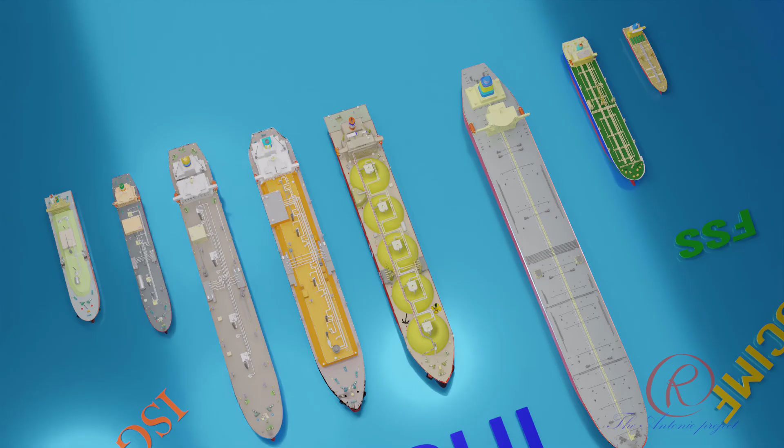Inert gas in maritime industry. Inert gases are widely used in the maritime industry, primarily for safety and operational purposes, especially in hazardous cargo tank management and fuel systems. As previously discussed, the term inert gas is context dependent. In the maritime industry, as per the International Safety Guide for Oil Tankers and Terminals or ISGOTT, inert gas is defined as a gas or a mixture of gases, such as flue gas, containing insufficient oxygen to support the combustion of hydrocarbons.

Oil Companies International Marine Forum or OCIMF recommends that all oil tankers, regardless of size, be equipped with inert gas generators to enhance safety. New statutory requirements for fixed inert gas systems entered into force on 1 January 2016 as a result of changes to SOLAS, the Fire Safety Systems or FSS code, and the International Bulk Chemical or IBC code.

International Maritime Organization or IMO regulations have progressively mandated the installation of inert gas systems on tankers of various sizes, with the latest rules covering all tankers of 8,000 deadweight tonnes.

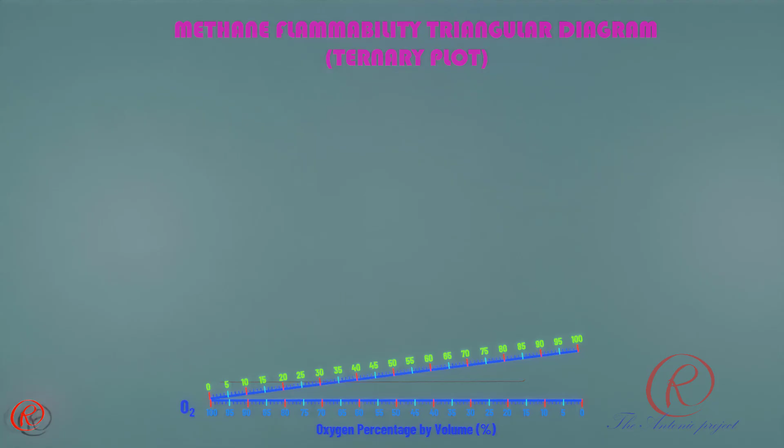Flammability triangular diagram or ternary plot. We will learn to draw a flammability triangular diagram, also known as a ternary plot. It is used to represent all the possible mixtures of a three-component system. The diagram shows the control of flammability in mixtures of fuel, oxygen, and inert gas, typically nitrogen. The diagram implicitly uses the feature that the sum of all three components is 100%. This diagram is for methane or CH4 as fuel, located on the left leg, nitrogen on the right leg, and oxygen on the bottom.

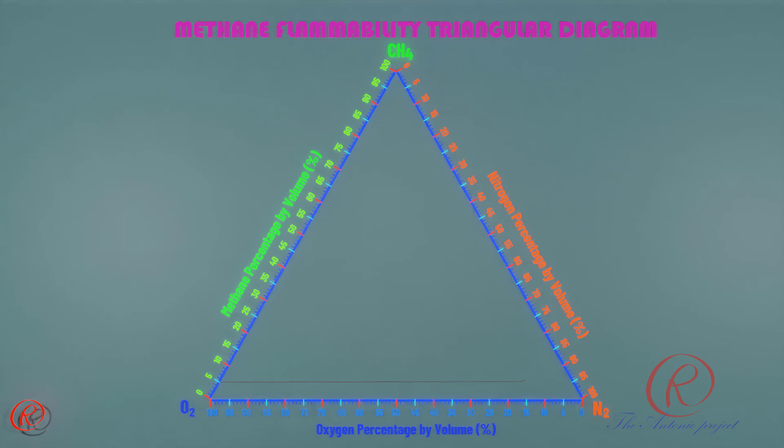Air line: the percentage of oxygen in the air is 20.95%. Lower flammability limit, or LFL: the lowest concentration at which a mixture of flammable vapor or gas and air is flammable. The lower flammability limit of methane is 5%. Upper flammability limit, or UFL: the highest concentration at which a mixture of flammable vapor or gas and air is flammable. The upper flammability limit of methane is 15%.

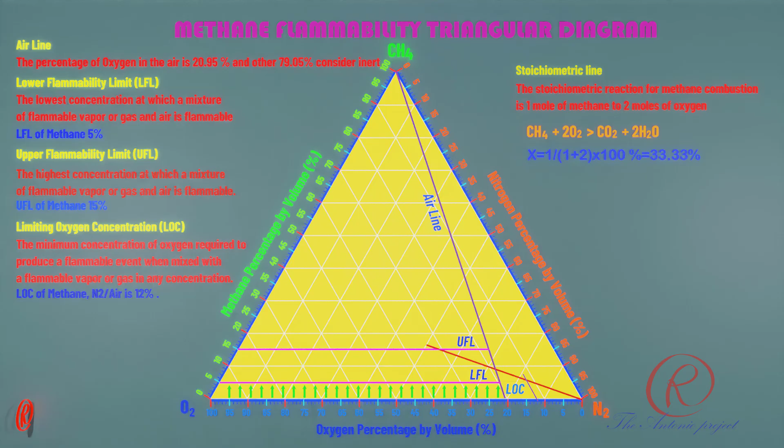Limiting oxygen concentration, or LOC: the minimum concentration of oxygen required to produce a flammable event when mixed with a flammable vapor or gas in any concentration. The limiting oxygen concentration of methane in air is 12%. The stoichiometric line: the line that shows the concentration of a substance in a mixture that is in the correct ratio to react with another substance.

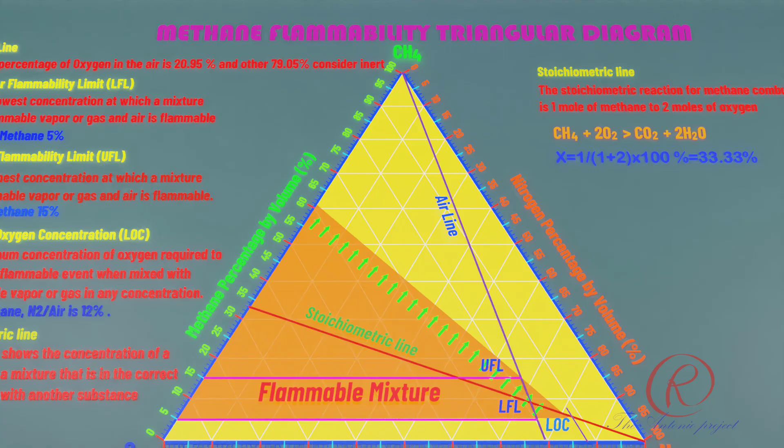The stoichiometric concentration of methane in oxygen is 1 mole of methane to 2 moles of oxygen: CH4 + 2O2 → CO2 + 2H2O. The result of calculating the stoichiometric concentration of methane in oxygen is 33.33%. The lower limit at which methane in oxygen can burn is 5.1% and the upper limit is 61%. The brown shaded area shown in this animation is the flammable mixture area. This is illustrated in the animated diagram, where only mixtures within a loop-shaped area are capable of burning.

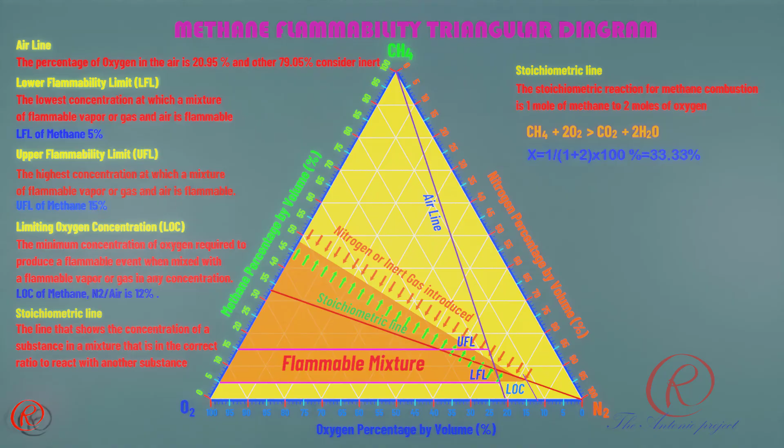In order to prevent or extinguish fires, inert gas is used by increasing the inert gas concentration. Inert gases suppress fires primarily by reducing the oxygen concentration in the environment to a level where combustion cannot be sustained. When the inert gas, in this case nitrogen, concentration is increased, the concentration of methane and oxygen will reduce. Then the flammable mixture decreases from the upper flammability limit until it reaches the lower flammability limit. And when inert gas is continuously added, no fire can form in a gas mixture below the lower flammability limit, even when oxygen is added.

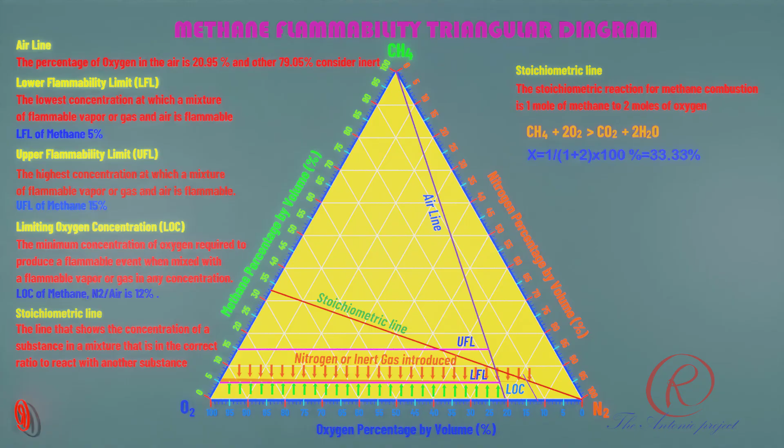Adding an inert gas to a hydrocarbon gas-air mixture increases the lower flammability limit concentration and decreases the upper flammability limit concentration. And that is the principle of how inert gas works to prevent or extinguish the fire.

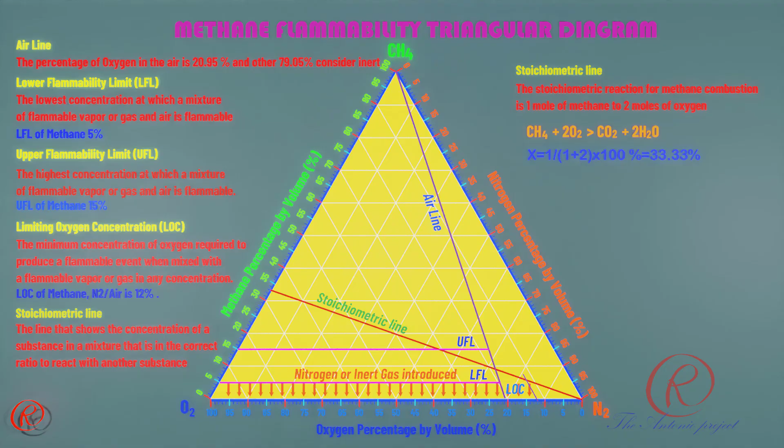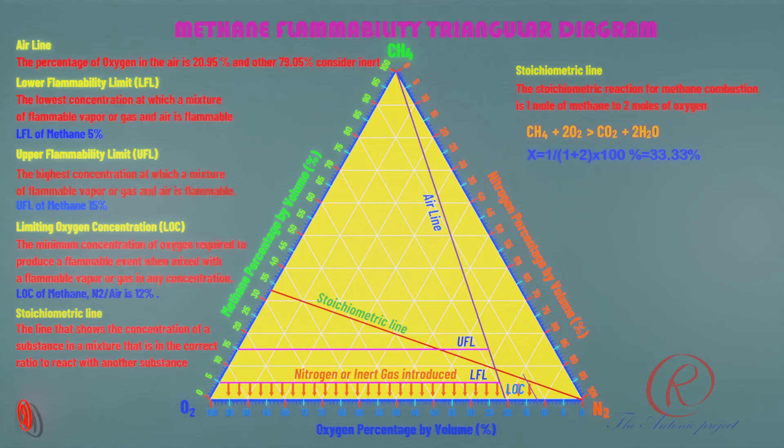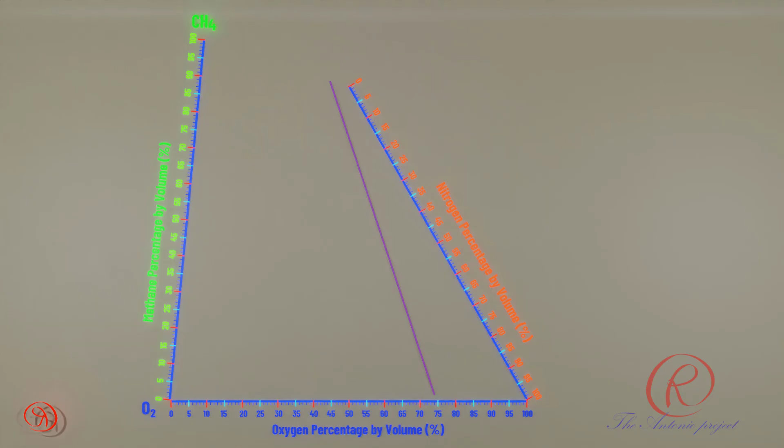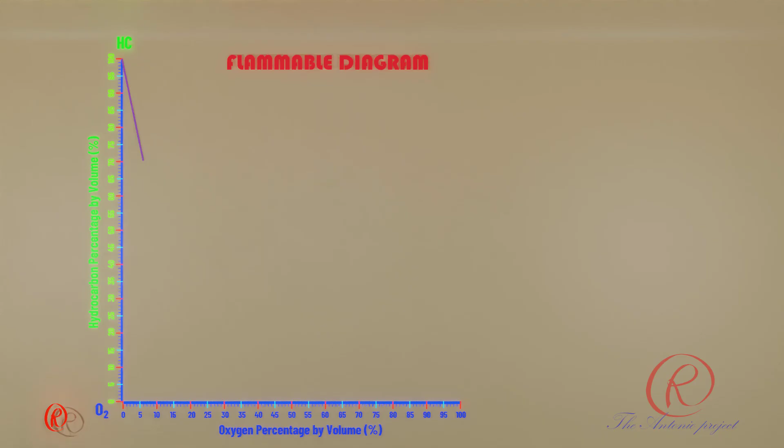Flammability composition diagram, or flammability diagram. Next, we will learn about the flammability composition diagram, also known as the flammability diagram or combustion diagram. It's a graphical representation used to illustrate the conditions under which a mixture of fuel, oxygen, and an inert gas like nitrogen can ignite or sustain combustion. The percentage of oxygen in the air is about 20.95%. Other gases except methane and hydrogen are considered inert gas. In total, the concentration of inert gas is about 79.05%.

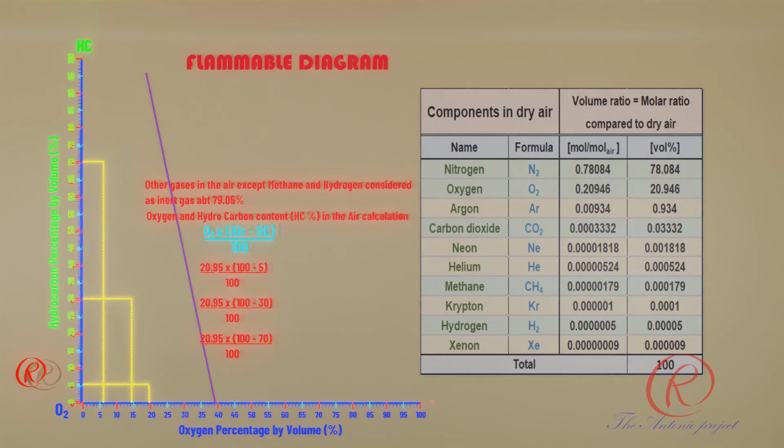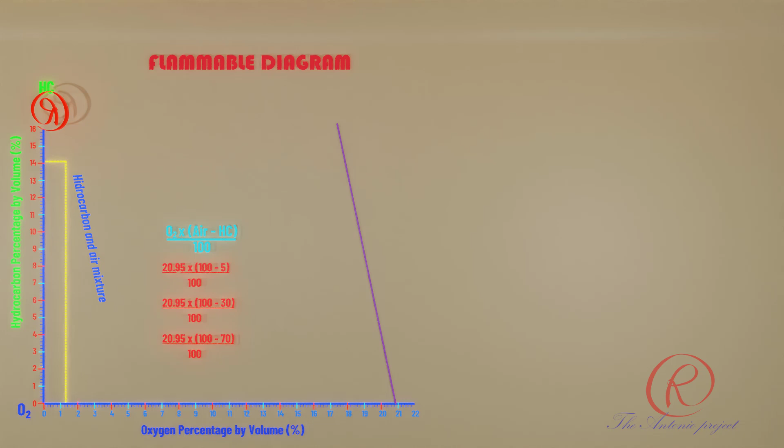The oxygen and hydrocarbon mixture in air calculation is as follows. The formula is oxygen in air times (100 minus hydrocarbon) divided by 100. For example, when the hydrocarbon concentration is 5%, the oxygen concentration of the air and hydrocarbon mixture is 19.90%. When hydrocarbon is 30%, the mixture is 14.67%. When hydrocarbon is 70%, the mixture is 6.29%, and so on. When the hydrocarbon and air mixture values are connected, it creates a slope line of mixture between hydrocarbon and air. In the flammability diagram, the slope or slant line of the hydrocarbon and air mixture is indicated with points A and B.

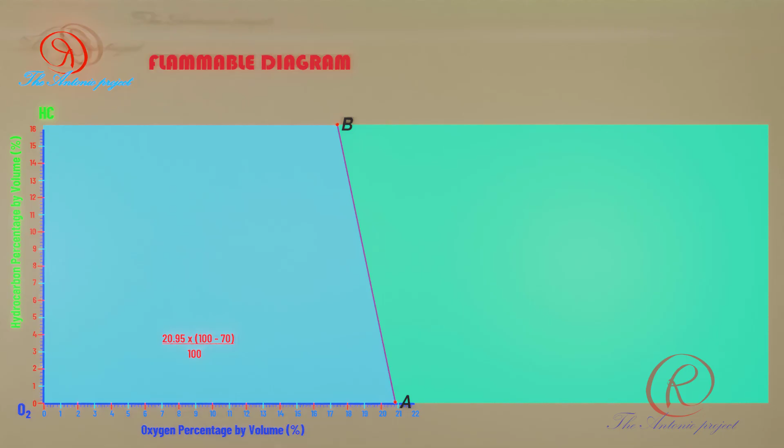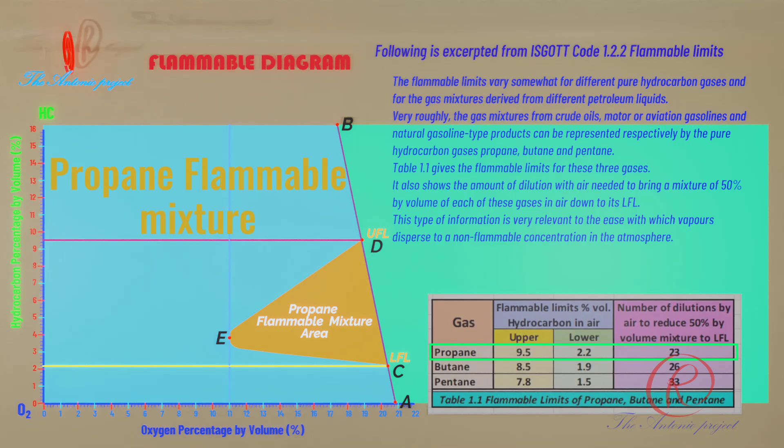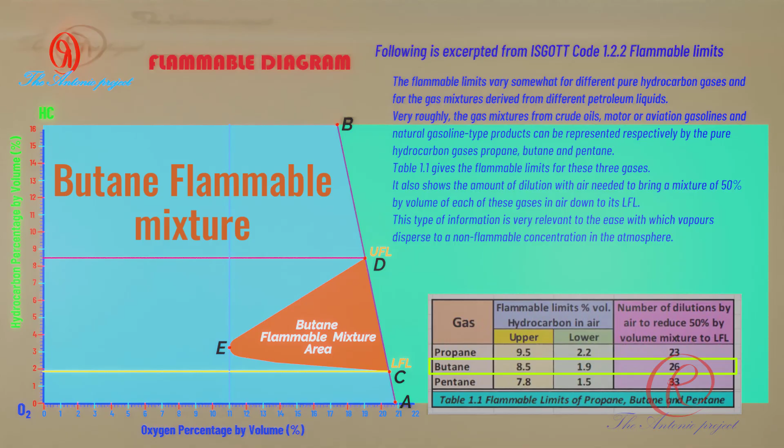Following is excerpted from ISGOTT 1.2.2, Flammable Limits. The flammable limits vary somewhat for different pure hydrocarbon gases and for the gas mixtures derived from different petroleum liquids. Very roughly, the gas mixtures from crude oils, motor or aviation gasoline, and natural gasoline type products can be represented respectively by the pure hydrocarbon gases propane, butane, and pentane. Table 1.1 gives the flammable limits for these three gases. It also shows the amount of dilution with air needed to bring a mixture of 50% by volume of each of these gases in air down to its lower flammable limit, or LFL.

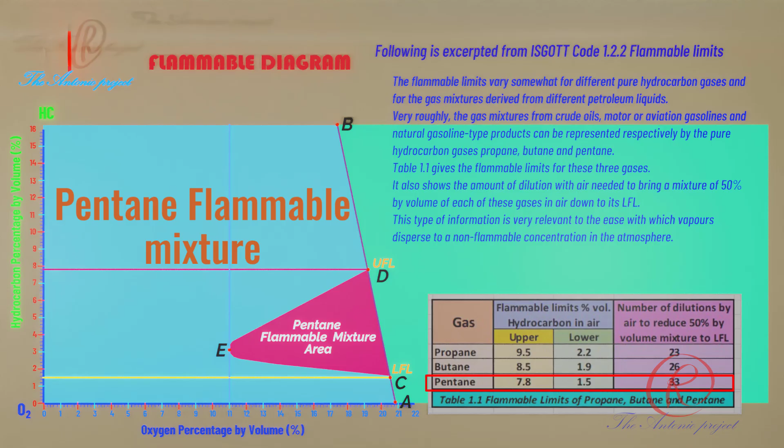This type of information is very relevant to the ease with which vapors disperse to a non-flammable concentration in the atmosphere. In practice, the lower and upper flammable limits of oil cargoes carried in tankers can, for general purposes, be taken as 1% and 10% by volume, respectively.

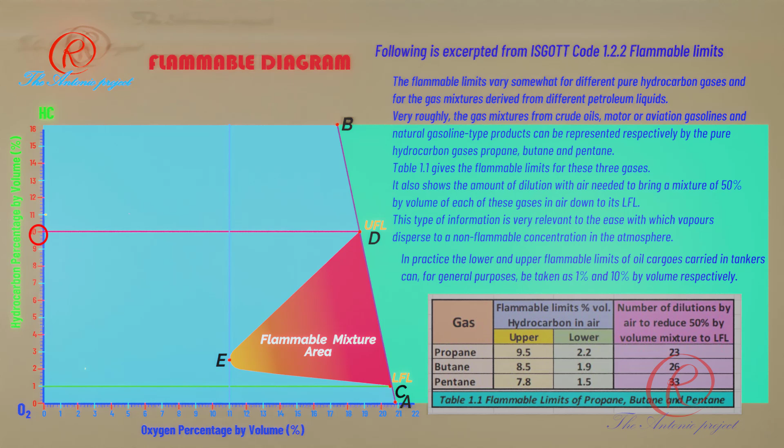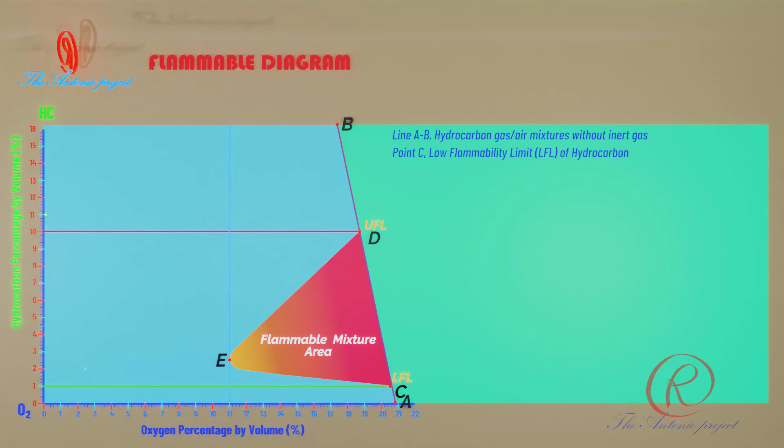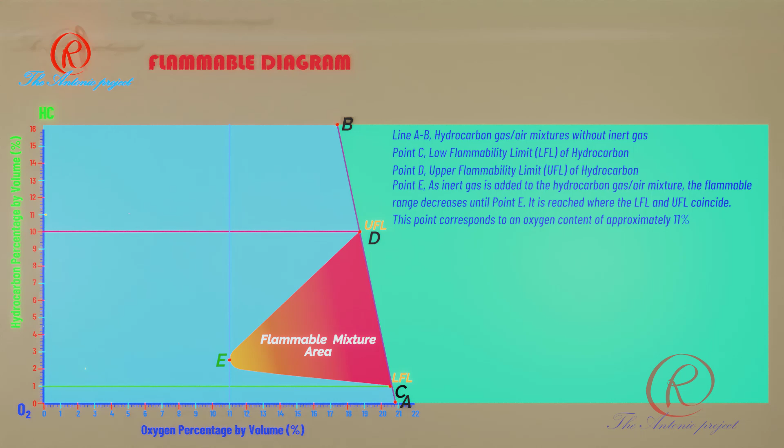Line AB, hydrocarbon gas or air mixtures without inert gas. Point C, lower flammability limit or LFL of hydrocarbon. Point D, upper flammability limit or UFL of hydrocarbon. Point E: as inert gas is added to the hydrocarbon gas or air mixture, the flammable range decreases until point E is reached, where the LFL and UFL coincide. This point corresponds to an oxygen content of approximately 11%.

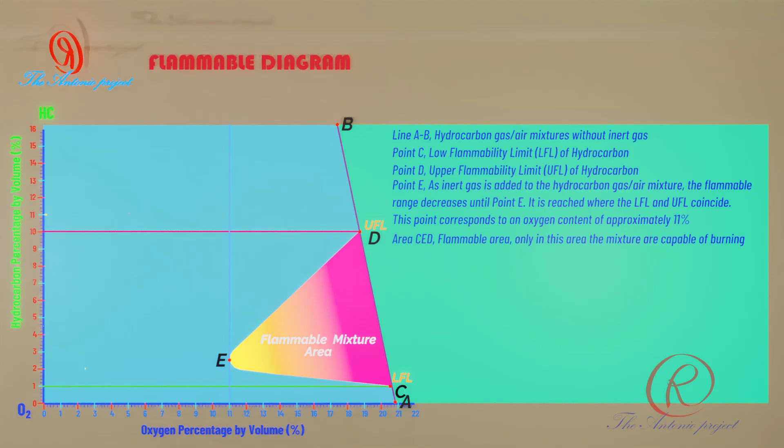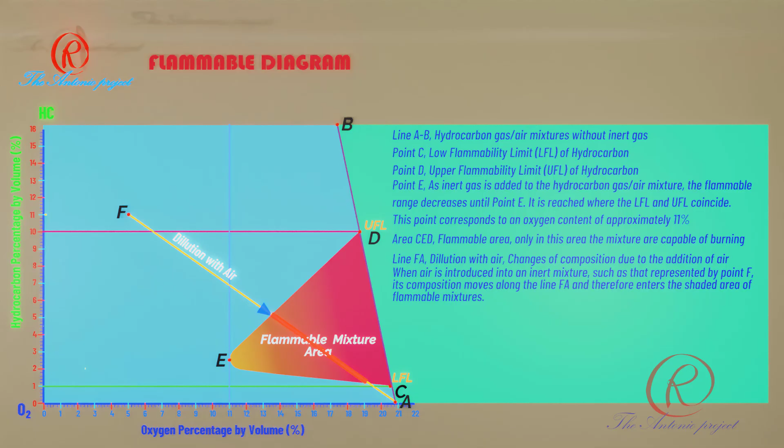Area CED, flammable area. Only in this area are the mixtures capable of burning. Line FA, dilution with air, changes of composition due to the addition of air. When air is introduced into an inert mixture such as that represented by point F, its composition moves along the line FA and therefore enters the shaded area of flammable mixture. Line GA, critical dilution with air. The line GA passes by just touching the flammable range portion of the diagram.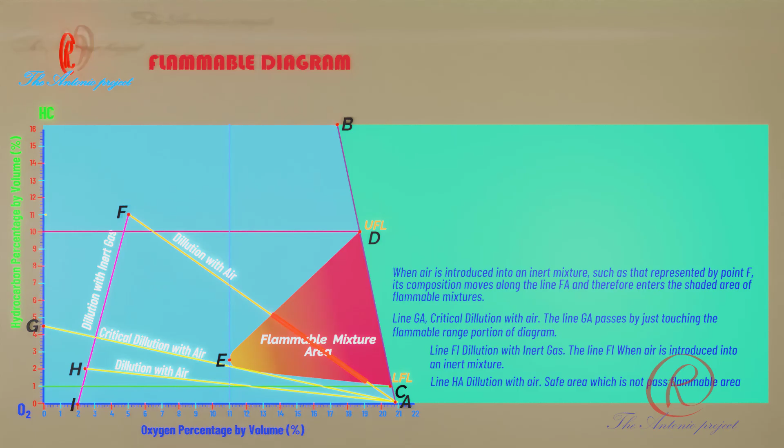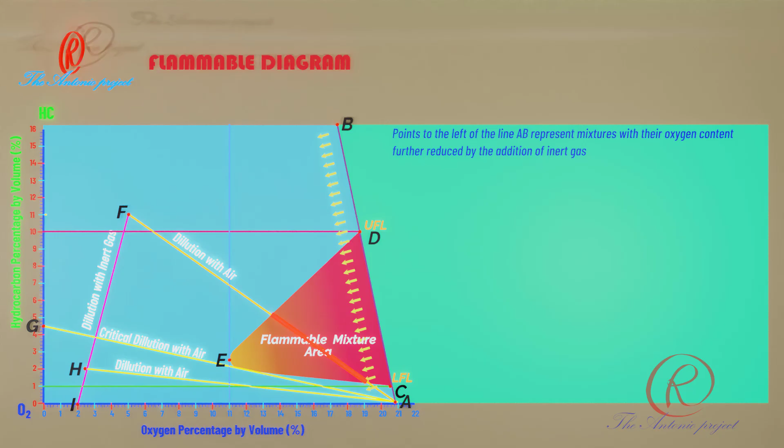Line FI, dilution with inert gas. The line FI when inert gas is introduced into an inert mixture. Line HA, dilution with air, safe area which does not pass the flammable area. Points to the left of the line AB represent mixtures with their oxygen content further reduced by the addition of inert gas. As the inert gas content increases, the flammable limit mixtures change as indicated by the lines CE and DE, which finally converge at the point E.

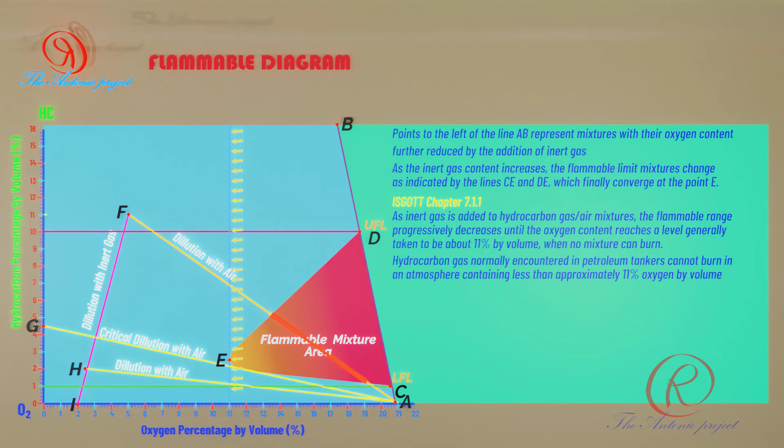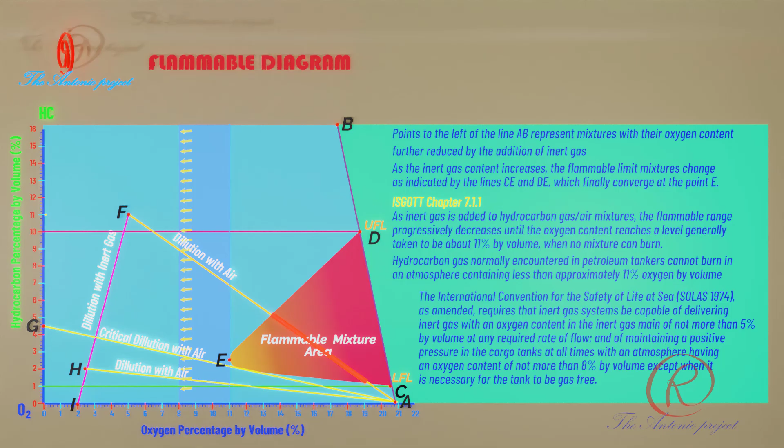ISGOTT Chapter 7.1.1. As inert gas is added to hydrocarbon gas or air mixtures, the flammable range progressively decreases until the oxygen content reaches a level generally taken to be about 11% by volume, when no mixture can burn. Hydrocarbon gas normally encountered in petroleum tankers cannot burn in an atmosphere containing less than approximately 11% oxygen by volume.

The International Convention for the Safety of Life at Sea, or SOLAS 1974, as amended, requires that inert gas systems be capable of delivering inert gas with an oxygen content in the inert gas main of not more than 5% by volume at any required rate of flow, and of maintaining a positive pressure in the cargo tanks at all times with an atmosphere having an oxygen content of not more than 8% by volume, except when it is necessary for the tank to be gas-free.

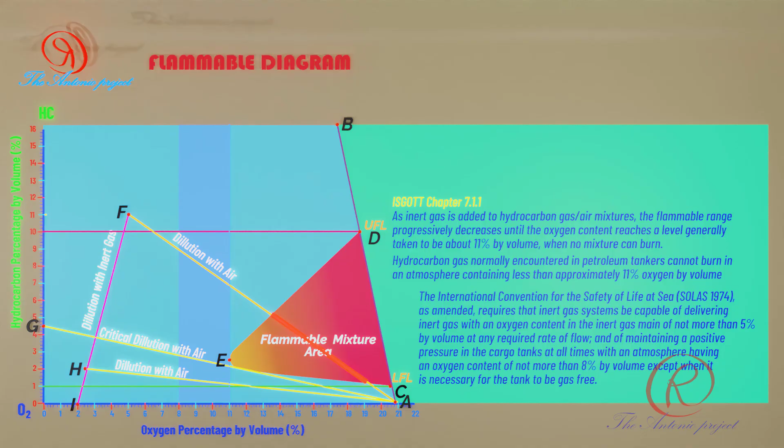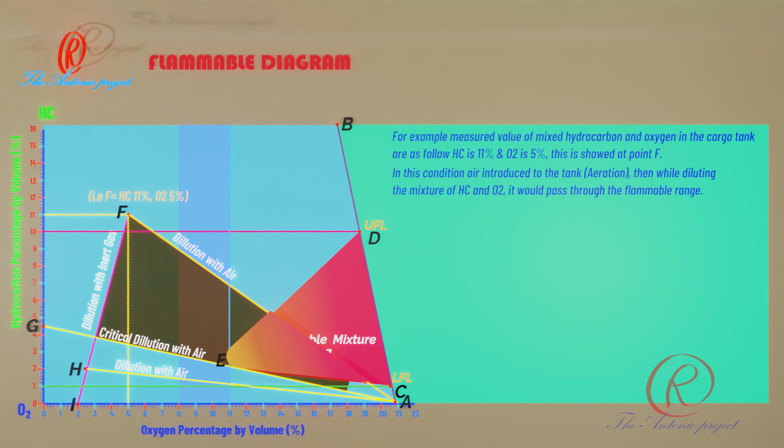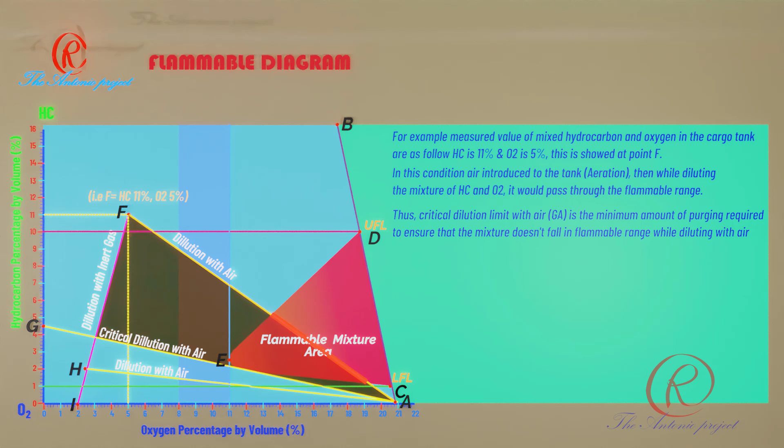For example, the measured values of mixed hydrocarbon and oxygen in the cargo tank are as follows: hydrocarbon is 11% and oxygen is 5%. This is shown at point F. In this condition, air is introduced to the tank, or aeration. Then, while diluting the mixture of hydrocarbon and oxygen, it will pass through the flammable range. The critical dilution limit with air, or GA, is the minimum amount of purging required to ensure that the mixture doesn't fall in the flammable range while diluting with air.

To be on the safer side, continue purging the mixture from point F even beyond the critical dilution limit with air, to prevent any fire hazard due to the purged mixture passing through the flammable range during dilution with air. The purging is continued till the mixture reaches point H. From point H, if the mixture is diluted with air of 21% oxygen, it will follow the line HA, which doesn't fall in the flammable range. Hence, a safe condition is maintained throughout the process.

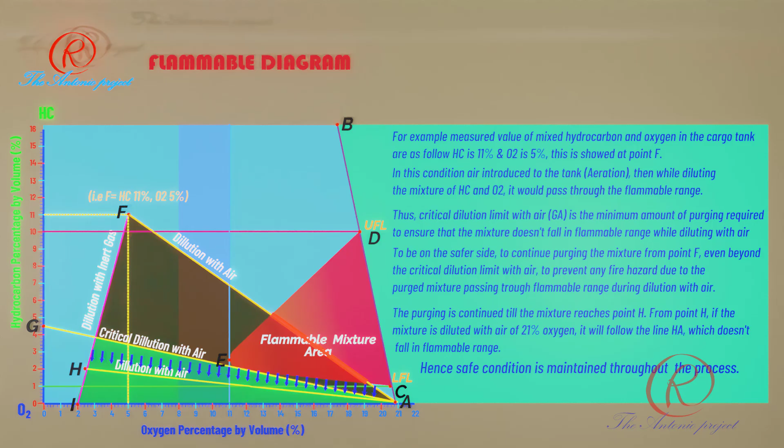It is well understood that the use of inert gas itself doesn't guarantee a safe tank environment during tank operation unless inert gas dilution is above the critical limit. This is the end of inert gas system part 3, about the definition of inert gas in the maritime industry. In conclusion, in the classical definition, inert gas is unable to react with other elements to form compounds. Meanwhile, inert gas in maritime is a gas or mixture of gases containing insufficient oxygen to support the combustion of hydrocarbons. We will dive deeper into inert gas used for tanker vessels in the next inert gas system part 4. That's all for now.